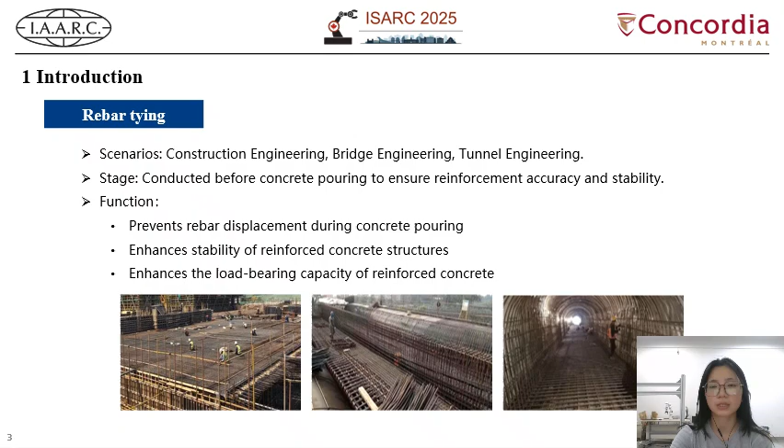Let me start with the fundamentals of rebar tying. Rebar tying is a critical procedure in concrete construction, commonly applied in bridges, tunnels, and buildings. It is executed prior to concrete pouring to ensure structural stability by preventing rebar displacement. Currently, rebar tying is predominantly manual work. The process involves 2 main steps. First, looping the tie wire around the rebar intersection. Then, twisting the wire tight using tools.

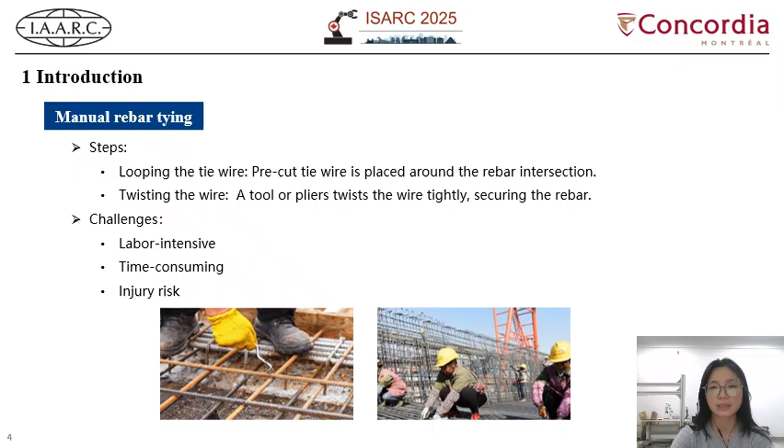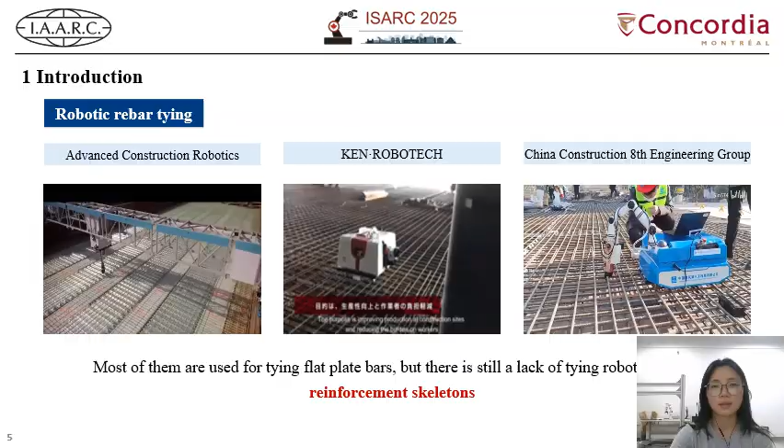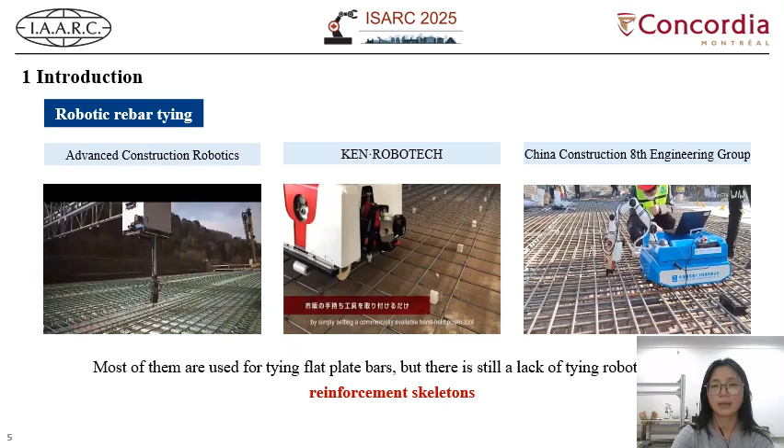However, this manual approach is facing significant challenges. It is extremely labor-intensive, time-consuming, and poses injury risk to workers. Those limitations have driven the need for automatic solutions. Several robotic solutions have emerged to address those challenges. However, there is a critical limitation. Most of those systems are designed for tying flat plate rebars only. There is still a significant gap in robots capable of handling 3D reinforcement skeletons with rebar planes oriented in various directions.

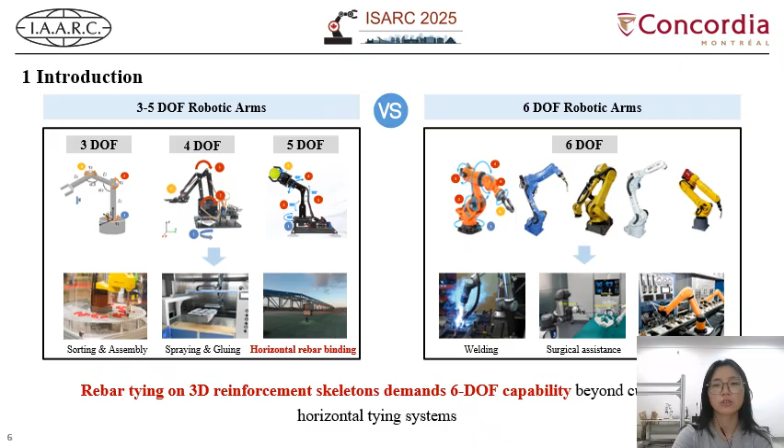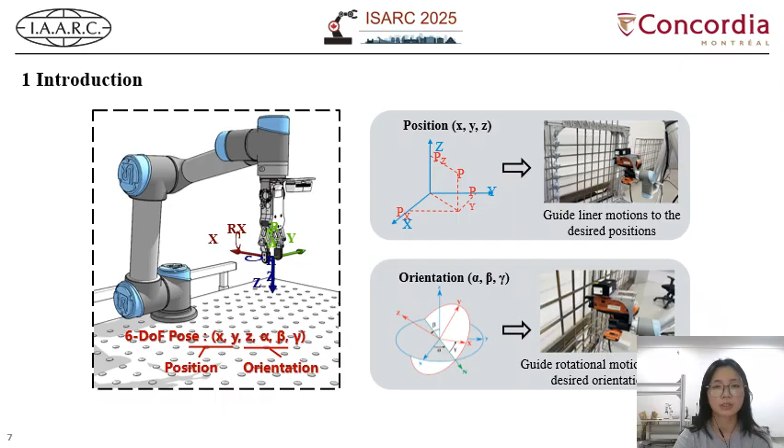To understand this limitation, let's examine the degrees of freedom requirement. Current horizontal rebar tying uses 3 to 5 degrees of freedom systems. However, for complex 3D reinforcement structures which require tying operations on vertical or inclined surfaces, we need 6 degrees of freedom systems that provide full translational and rotational capabilities. Pose information is very important for 6 degrees of freedom robotic arm operation, and it consists of both positional and orientational components. This brings us to the core research problem.

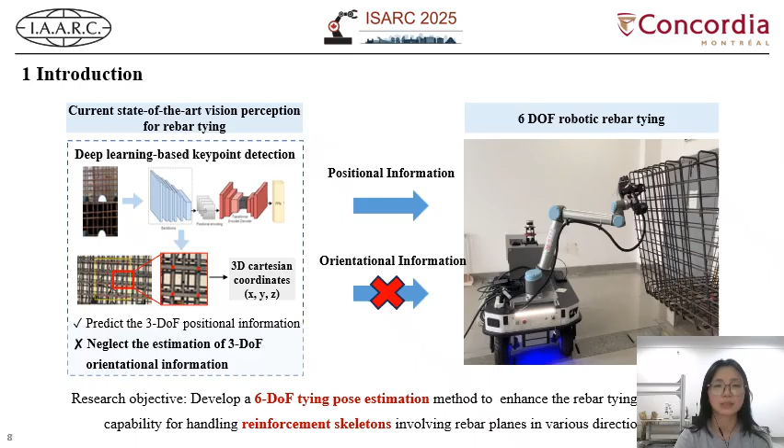Current state-of-the-art vision perception for rebar tying uses deep learning-based keypoint detection, which successfully predicts positional information but completely neglects the orientational information. This creates a critical gap between current capability and the requirements for 6 degrees of freedom robotic rebar tying. Our research objective is to develop a 6 degrees of freedom tying pose estimation method that enhances robotic capability for handling reinforcement skeletons with rebar planes in various directions.

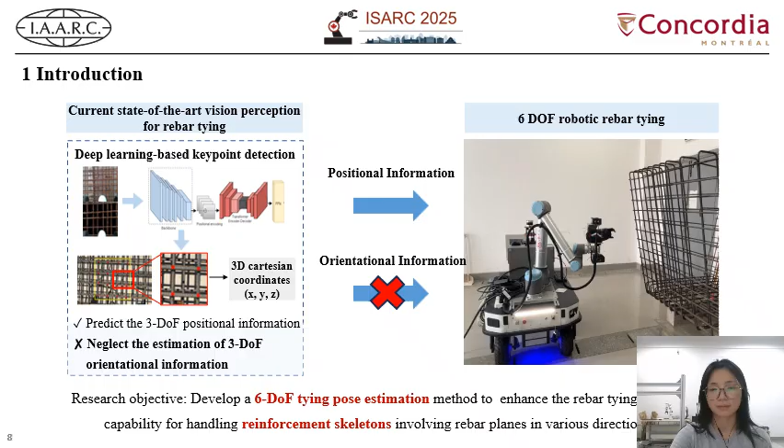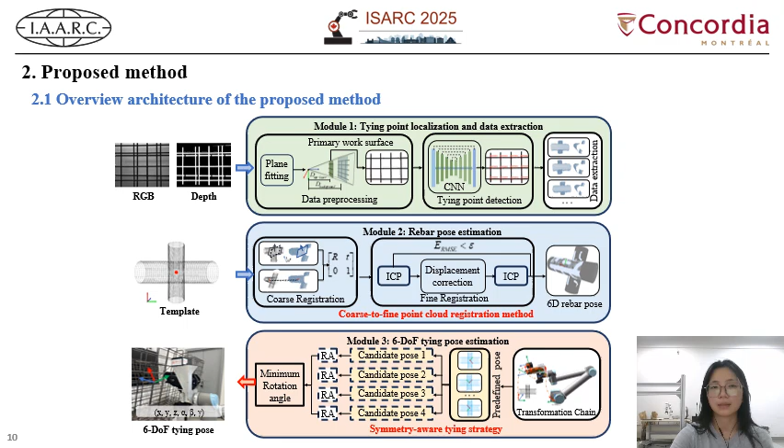Now, let me explain our proposed method. Our method consists of 3 modules. Module 1 acts as a preprocessing module to generate input data and prior displacement information for rebar pose estimation. In Module 2, a coarse-to-fine point cloud registration method is proposed to estimate the pose of rebar in intersection areas by computing the transformation needed to align the node template with observed data. In Module 3, a symmetry-aware tying strategy is employed to optimize the conversion from rebar poses to tying poses by determining the optimal roll angle.

Here is the detailed workflow of our coarse-to-fine registration method. This method consists of two steps as follows. In step 1, coarse registration, the goal is to achieve a rough alignment of the template point cloud with the rebar point cloud. This is accomplished by finding the appropriate rotation matrix and translation vector based on the geometric features of the template point cloud. In step 2, fine registration, the ICP algorithm is used to iteratively minimize the alignment error between the template point cloud and the rebar point cloud.

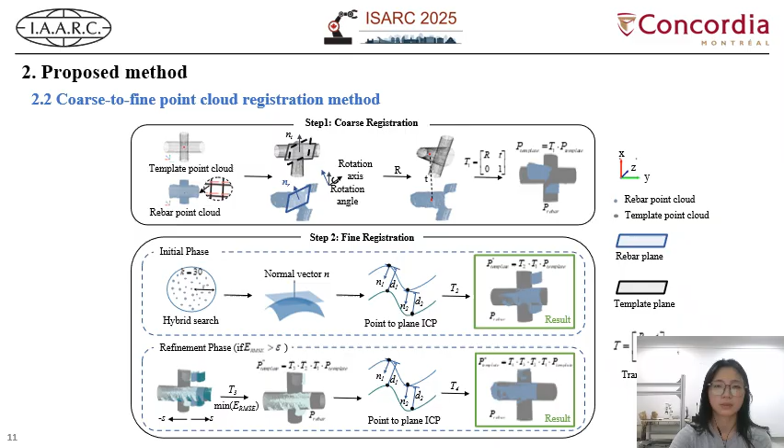Our symmetry-aware tying strategy consists of three key steps. First, we predefine multiple tying poses in the template coordinate frame. Second, we determine candidate tying poses in the base coordinate frame using forward kinematics. Finally, we select the optimal tying pose based on the minimal rotation angle requirement, which significantly reduces motion time and improves efficiency.

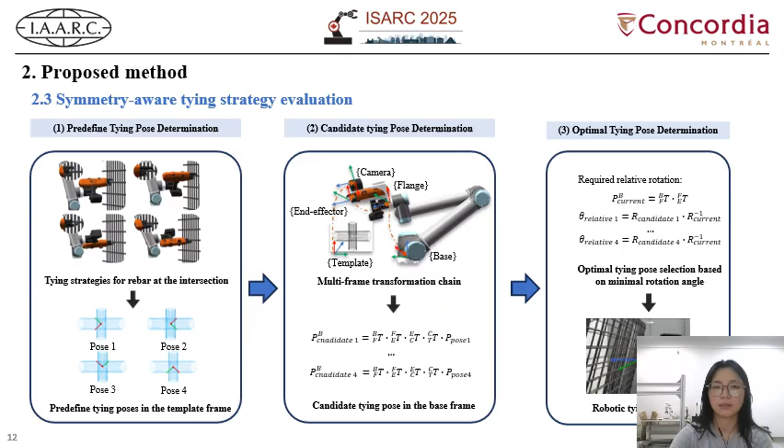Moving to our experimental results. Two experiments were conducted to validate the proposed method. Experiment 1 aims to test the effectiveness of the proposed coarse-to-fine point cloud registration method. Furthermore, experiment 2 explored the effectiveness of the proposed symmetry-aware tying strategy for 6 degrees of freedom tying pose estimation in Module 3. The result of experiment 1 demonstrates superior performance of our method. In registration accuracy and computational efficiency, our method significantly outperforms other methods like ICP, RANSAC, and CPD.

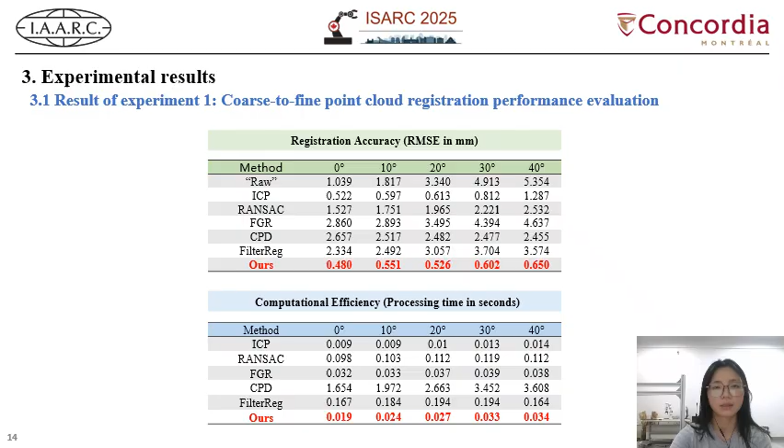In experiment 2, we selected 4 different poses across various scenes. The results demonstrate that the proposed strategy consistently outperforms the fixed template method, achieving substantial time savings in practical application.

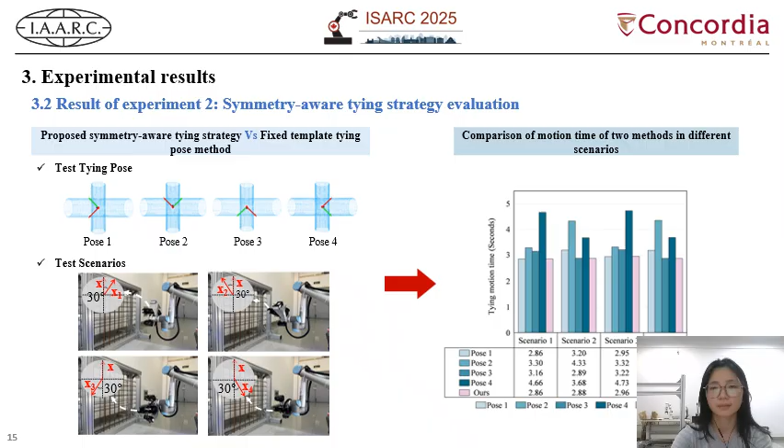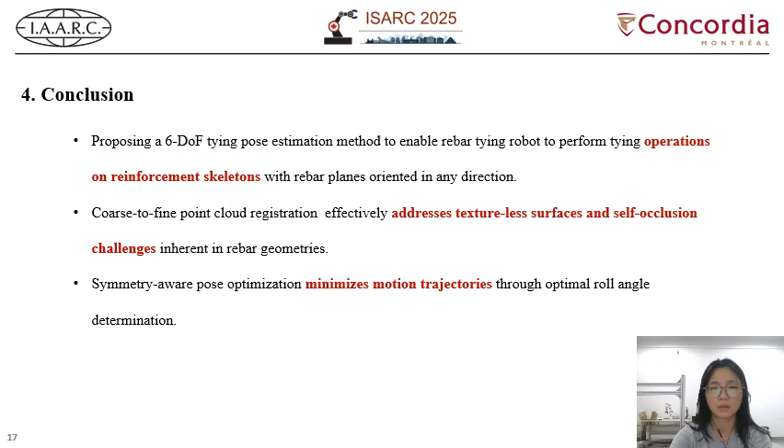In conclusion, this research makes several key contributions. First, we have developed 6 degrees of freedom tying pose estimation that enables rebar tying robots to perform operations on reinforcement skeletons with rebar planes oriented in any direction. Second, our coarse-to-fine point cloud registration method significantly addresses textureless surface and self-occlusion challenges. Third, the symmetry-aware pose optimization minimizes motion trajectories through optimal roll angle determination. In summary, our research successfully advanced robotic rebar tying from 2D to 3D reinforcement structures through 6 degrees of freedom pose estimation.